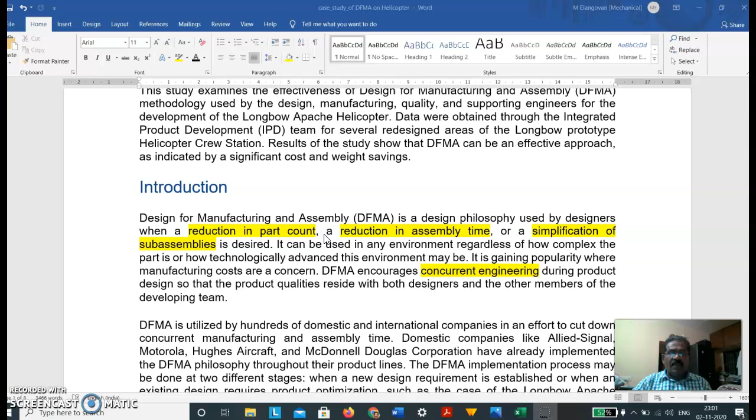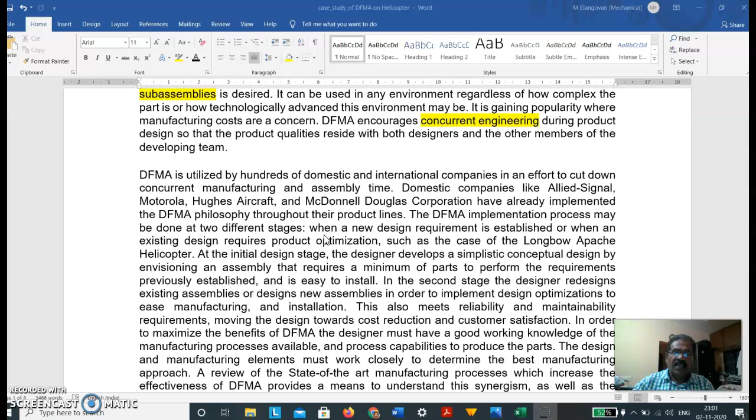On the introduction, we already know that DFMA focuses more on the reduction in part count, reduction in the assembly time, and the simplification of sub-assemblies, and it encourages concurrent engineering or simultaneous engineering. So many people have utilized DFMA and they have benefited by the concepts. So here we are going to look at how this is being used for the helicopter made by McDonnell Douglas.

High speed machining also is a new concept where the spindle speed is more than 10,000 RPM. When it is used in a DFMA environment, it allows part count reduction by providing the machining capability to rapidly create geometrical parts normally designed with many mechanically fastened sheet metal parts. Instead of using multiple sheet metal parts, HSM is used to machine these things. Very thin walls it can machine.

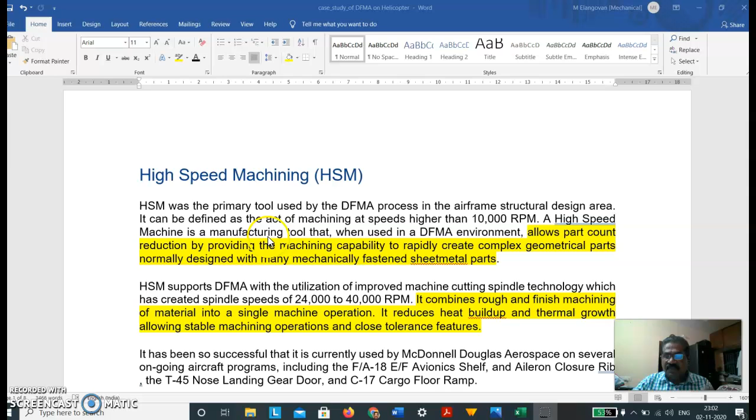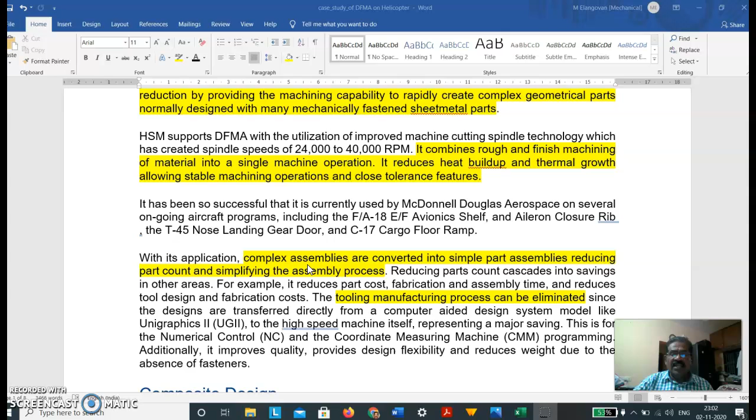It combines rough and finish machining of material into a single machine operation. It reduces the heat buildup and the thermal growth, allowing stable machining operations, and it can carry out very close tolerance features. In its application here, complex assemblies are converted into simple part assemblies, reducing the part count and simplifying the assembly process. Generally, the tooling manufacturing process can be eliminated because of this.

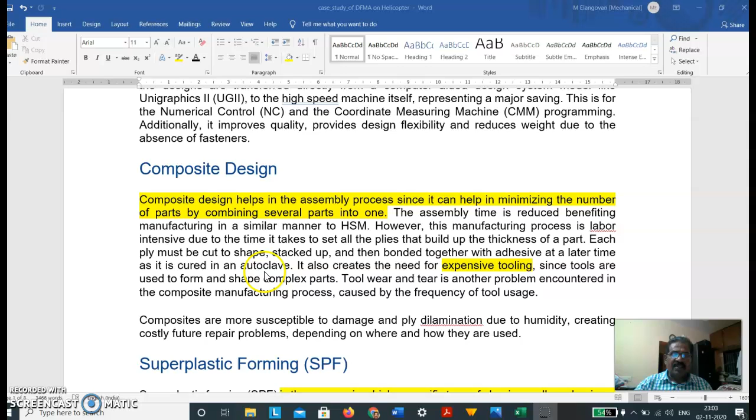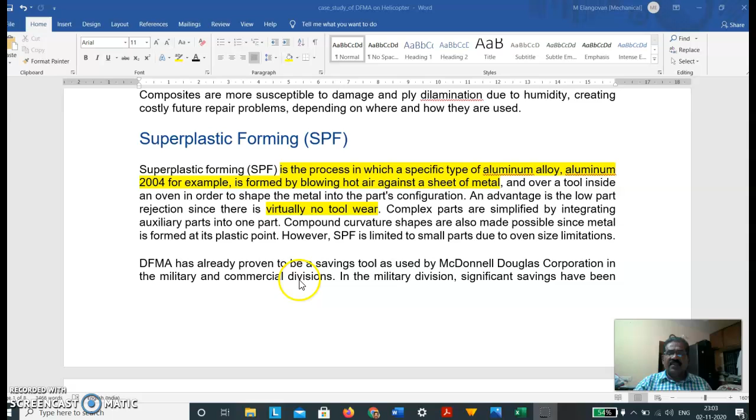Superplastic forming is a process in which a specific type of aluminum alloy, aluminum 2004 for example, is formed by blowing very hot air against a sheet of metal over the tooling inside an oven in order to shape the metal into the part's configuration. So whatever is the mold shape, this is more like a blow mold. Since there is virtually no tool wear, there's very low rejection. Superplastic forming is limited to very small parts due to oven size limitations.

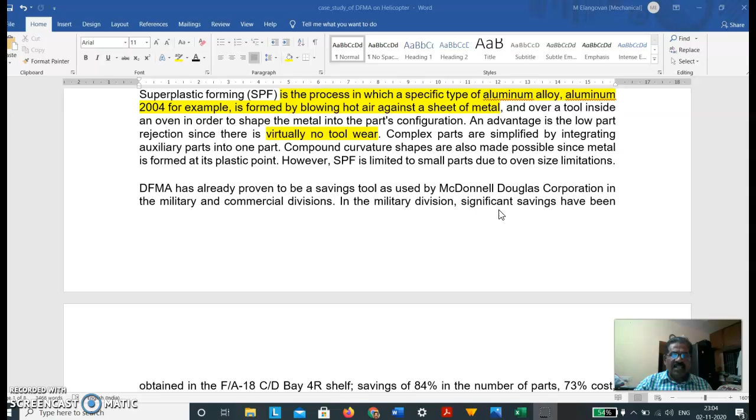So here again in the McDonnell Douglas Corporation, the military division's saving has been quite substantial, and they have saved quite a lot of money after they implemented the DFMA tools.

Coming back to the statement of the problem, during the engineering development of the Longbow Apache helicopter, McDonnell Douglas Helicopter Systems, MDHS, found that the traditional design methods would not provide adequate support to the challenging budget and schedule. New design methods had to be obtained and implemented in order to support the program objectives.

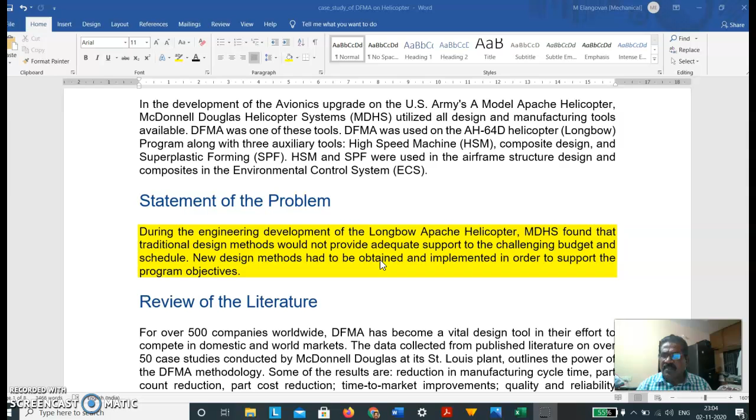They implemented DFMA to bring down the cost because they did not have the budget to spend that much, according to Geoffrey Boothroyd. We know that Boothroyd and Dewhurst are the fathers of the DFMA concepts. He's a professor of industrial and manufacturing engineering at the University of Rhode Island, and he brought the concepts of design for assembly and design for manufacture in the late 1970s at the University of Massachusetts.

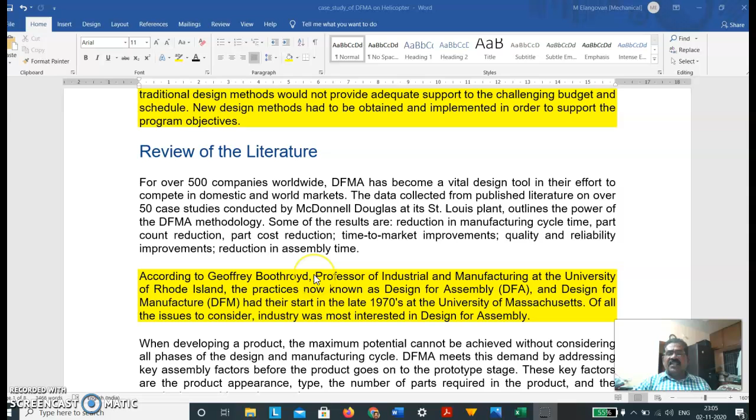Of all the issues to consider, industry was most interested in design for assembly. Okay, so the statement of the hypothesis is: what do we assume based on the success of DFMA to reduce cost and time on the other programs? It follows that the application onto the Longbow Apache modernization program should have similar savings. So that was a requirement. That was the understanding that they had brought.

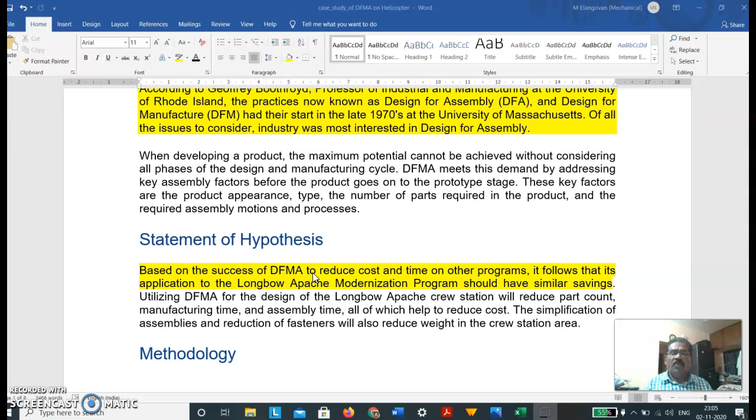The simplification of the assemblies and the reduction of fasteners will also reduce weight to the crew station area. Okay, so how did they do that? They tried to work on the design. There was an integrated product development team, and they used concurrent engineering where the representatives of several organizations such as engineering, manufacturing, procurement, supplies, product support, quality, and others all work together on the development of product design.

This design is then brought into production in a very short period of time without the budget and lengthy schedule usually encountered by other organizations without a team concept in place. Okay, so they have overcome all such kinds of hurdles. 6 helicopters were completed in the prototype phase, and the experience obtained from this phase was applied to the Longbow initiative projects. Okay, they tried to use one on the other.

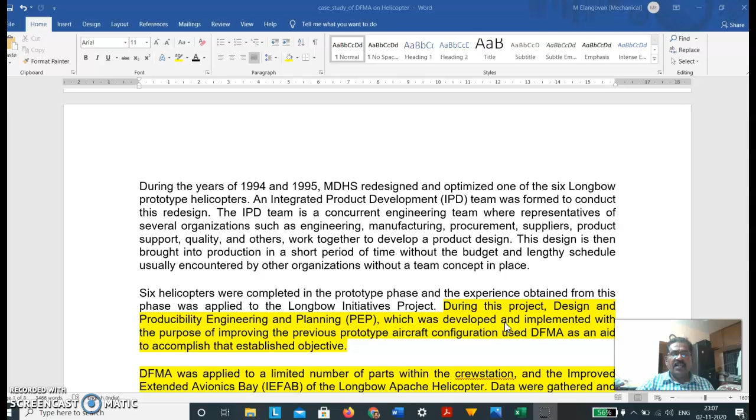During this project, design and producibility engineering and planning was developed and implemented with the purpose of improving the previous prototype aircraft configuration, and they used DFMA to aid this. It was applied for a limited number of parts within the crew station and the improved extended avionics bay of the Longbow Apache helicopter. Data was gathered and recorded by the IPD team, Integrated Product Development Team, and compared to the baseline prototype helicopters which were designed without using DFMA.

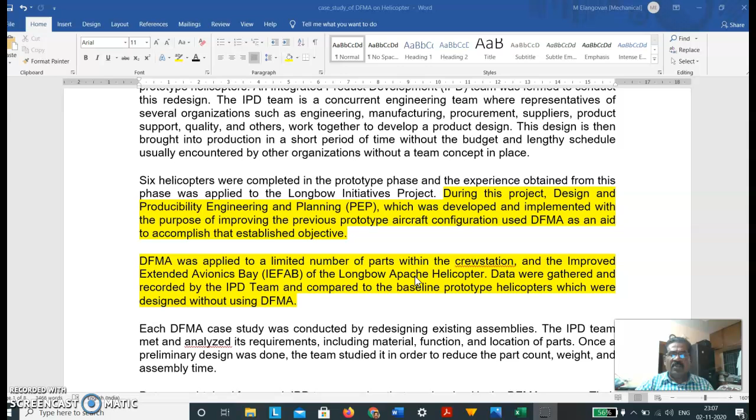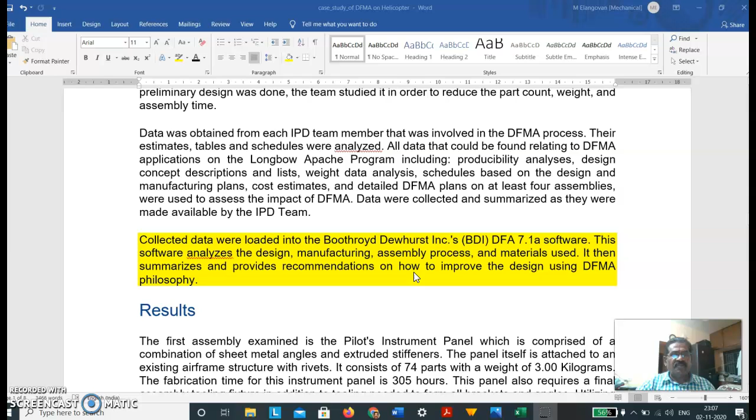They wanted to find out whether DFMA is useful or not. Okay, so the collected data was loaded into the software, and whatever the software recommended was implemented. Right, so these are the results. Okay, the pilot instrument panel. The part count was brought down from 74 pieces to 9 pieces. The fabrication time was brought down from 305 hours to 20 hours. The assembly installation time came down from 150 hours to much less than 8 hours.

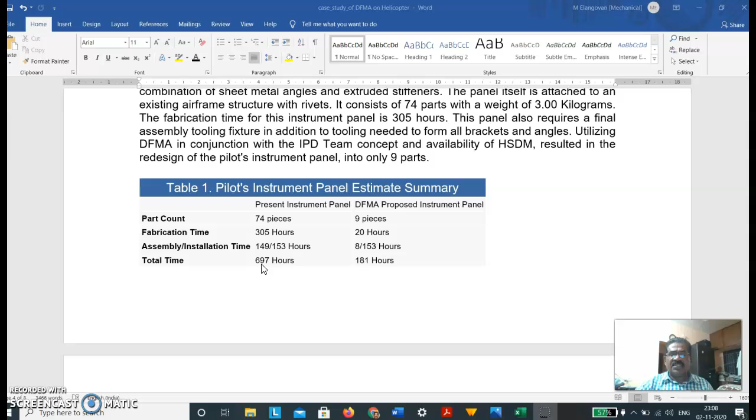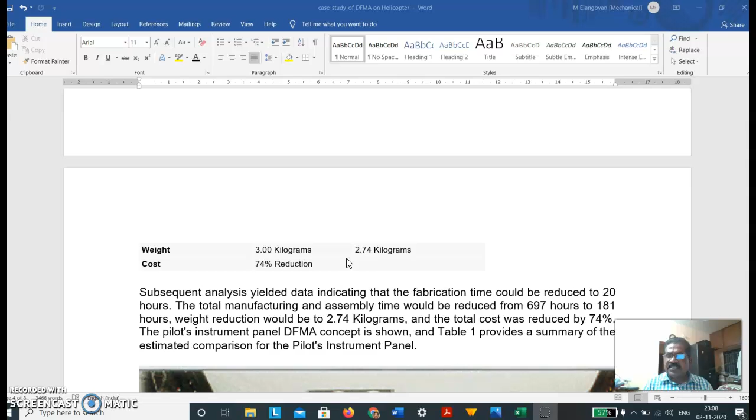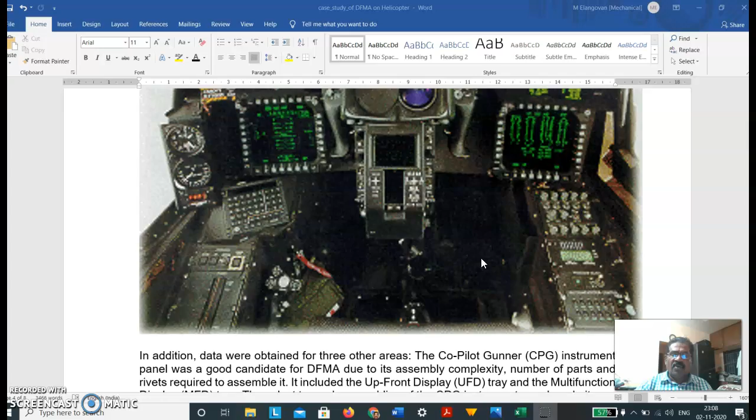And the total time of the entire thing was around 697 hours, and it came down to 181 hours. The weight was reduced from 3 kilograms to 2.74 kilograms. Okay, and a cost reduction of 74%. So this clearly justifies the usage of DFMA in all new development processes. So this is the panel that was developed, the panel and the cluster, and for such kinds of applications, definitely DFMA reduces the assembly complexity, the number of parts, and so on. Okay, so we already talked about the cost reduction.

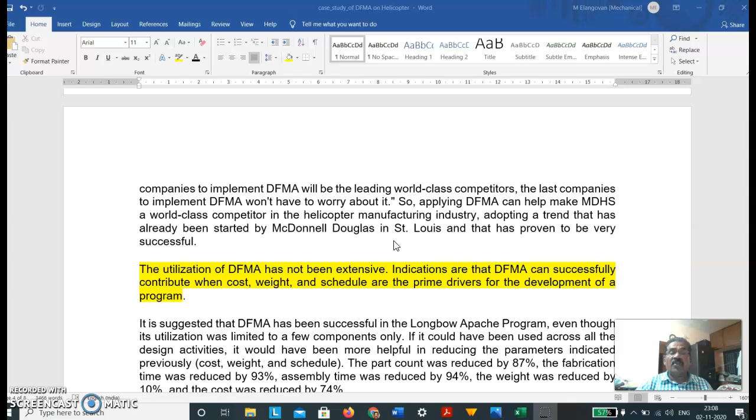Concluding, the utilization of DFMA has not been extensive. Indications are that DFMA can successfully contribute when cost, weight, and schedule are the prime drivers for the development of the program. So what is required for this? Training is a must. Okay, people must have the concept of DFMA. The management's commitment to DFMA can bring in the success of the program, along with making the decision on educating the employees.

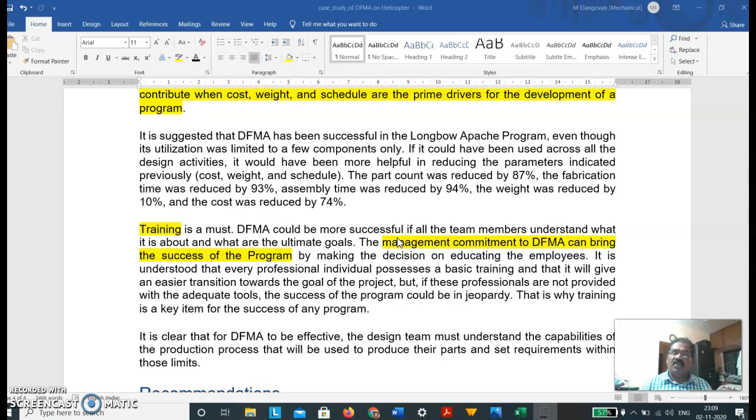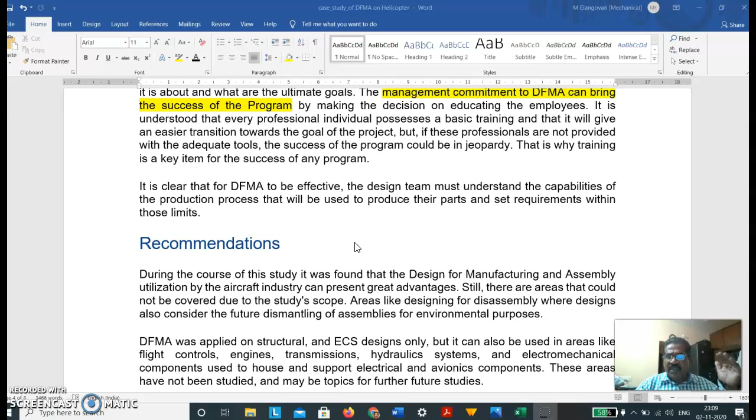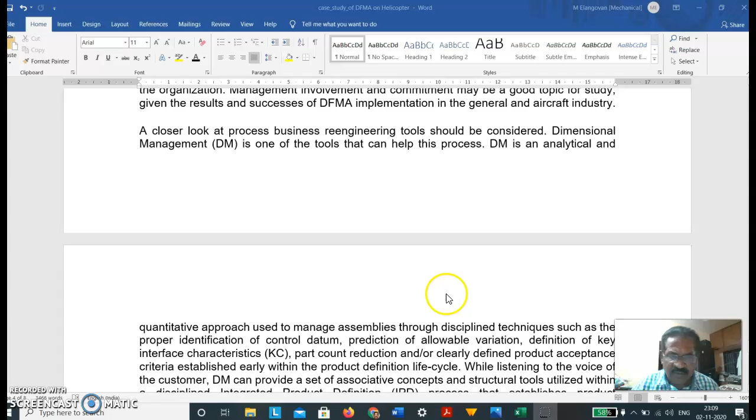Okay, so the clear recommendation is that design for manufacturing and assembly utilization by the aircraft industry can present great advantages. Every gram of the flying helicopter, when it comes down, a lot of saving happens there. Okay, so that is the end of this case study. We found how this has been helpful in the design and manufacture of this helicopter, and how DFMA was utilized in McDonnell's company, right?